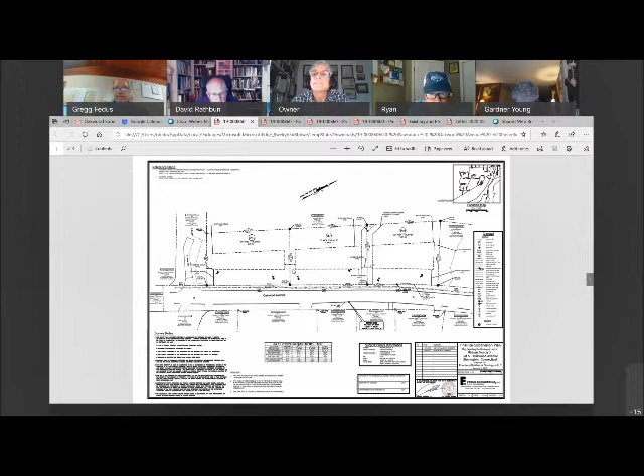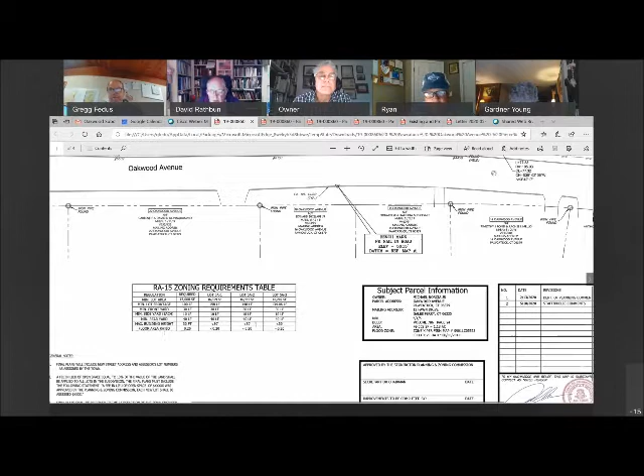So there's the 3 lots. I'm going to blow up the zoning table for the RA-15 zone. As you can see, the minimum requirements are all met: front yard, side yard, rear yard, height, floor area ratio. I'm going to go into the site plans for each of the lots next.

These are the three site plans with a proposed house and garage on each of the lots. Just to put the retaining wall issue to bed, those retaining walls, although we don't show a specific height, if you interpret them they are probably over 3 feet and they're in the front yard. So you can make it a condition that no retaining wall on this project will be above 3 feet within the front yards.

Most likely we're going to remove them completely, but we did a conceptual kind of design, a feasibility design with the three houses shown. There's a driveway off of Oakwood Avenue for each of the lots, and there's sewer and water for each of the lots.

The proposed grading - it is a sloping piece of property that slopes from, I'd say, north to south, from the back of the property, more towards a little bit of a southern direction at Oakwood Avenue. And there's definitely some drainage issues that are going to be brought up by neighbors, I would expect. But what we did was put 2 rain gardens on each of the properties.

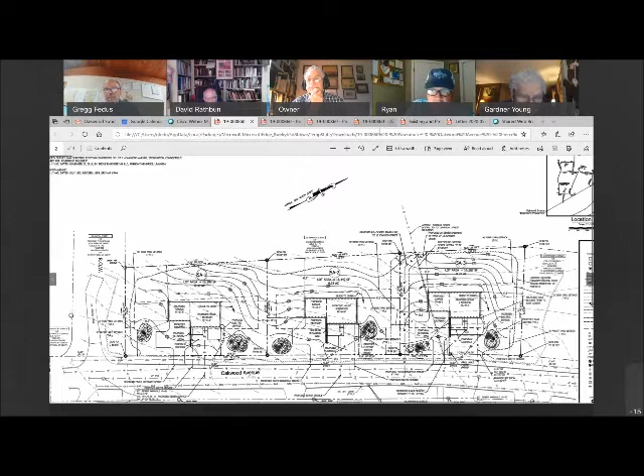Let me just flip to the next. So this is the erosion control plan, which basically shows the three anti-tracking pads, shows silt fence down gradient of all the disturbed areas, and then has the construction sequence and all the notes regarding erosion control and what we're going to be bound to do to basically keep silt and sediment on our site.

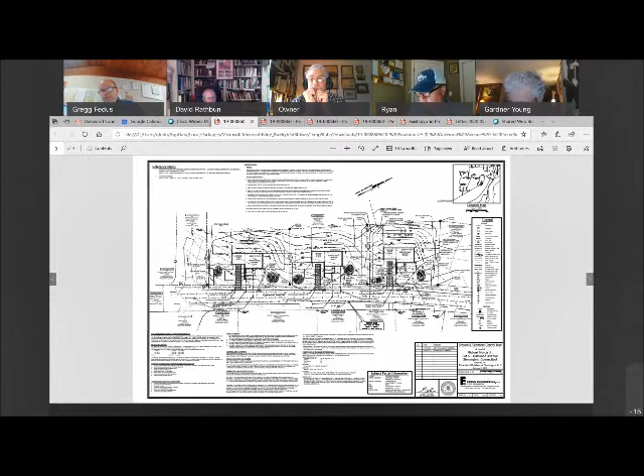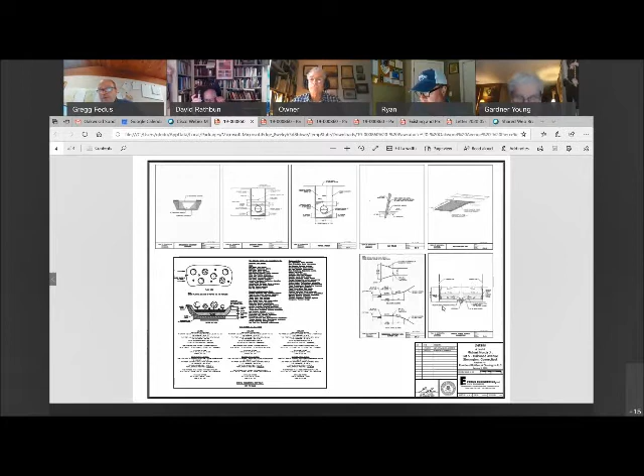The last sheet is the calculations of the rain garden, and then the trenching details and so forth for sanitary sewer, driveway design. These are all Town of Stonington standard details. See, that's our original application, which you have in front of you. That's the property survey. I have it up ready if someone wants to talk about it.

This is the letter written to Keith on May 20th, a summary basically for the stormwater. Typically we don't go into this much detail on a subdivision that's just a single family house on a 16,000 square foot lot, but we wanted to show the commission, Keith, and the neighbors that there's a reduction, again for the smaller 2 to 10 to 25 year storm, which is typically what we would design for, probably even less than that for this type of development.

Typically what DEEP likes to see, and historically what most towns, including probably Stonington, is for a single family house, you capture the first inch of rainfall, which is what our rain gardens show, capturing at least an inch. But you can see the 2 through 25 year storms do offer a reduction. There might be one case, lot 3, 2-year storm, with a 0.05 CFS increase, but then it drops down for the 10 and 25. The 50s go up by about 0.5 CFS, and the 100 years go up by about 1.3 CFS. Again, a real drop in the bucket when you're looking at the entire watershed and Oakwood Road or Oakwood Avenue.

So I feel like our 3 lots, we've gone above and beyond with the stormwater, really taking into account the roof leaders and most of the drainage. I'm just going to flip to that. That's the existing drainage for each of the lots. You can see basically everything runs to the front, to the southern corner of the lot. Then here the darker shaded area goes to rain garden 1, and the other hatching on the lot goes to the other rain garden. So there's not a lot left over we're not basically treating and retaining a little bit and infiltrating some of it into the ground. I think we did go above and beyond regarding stormwater.

We're definitely not going to cause any problems on Oakwood Avenue from this development. There are problems, I'm not disputing that there aren't problems there now. Some of them can be fixed pretty readily with allowing some kind of outlet down below. I know the neighbors have met with the Public Works Director to talk about that. I don't know what the exact results are from her. And a couple of the driveways definitely could use a little bit of work in order to keep water on the road so it doesn't run down their properties.

I think that's it, unless there's any questions regarding the project. Again, I think we got positive review letters from everyone at this point, and if there's any questions, we'd be happy to answer them. Thank you.

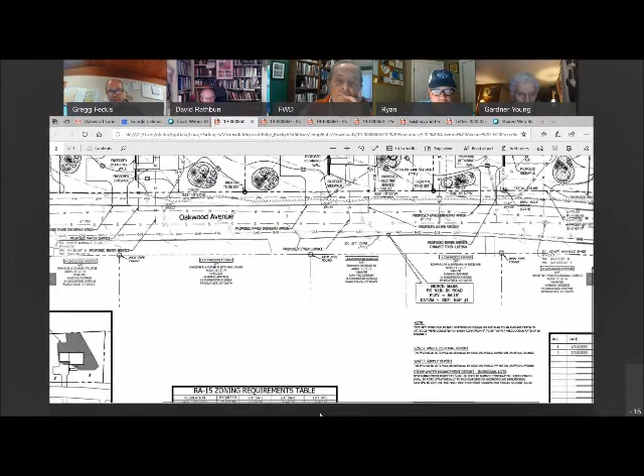Yes, Mr. Chair, this is Ben Philbrick. Where, Gregg, exactly is the ponding occurring now? Can you give me a street address? I know it was mentioned in one of the emails from the neighbors. Let me see. So this is 26 on the right of way here. I believe it's further, it might be the next property down to the south. It's away, but it's further down. I do have some photos I could bring up of it if the commission was interested.

It might take me a minute. To the south of 26 Oakwood, you say? Yeah, definitely the south of 26. Okay, thank you. Yes, sir.

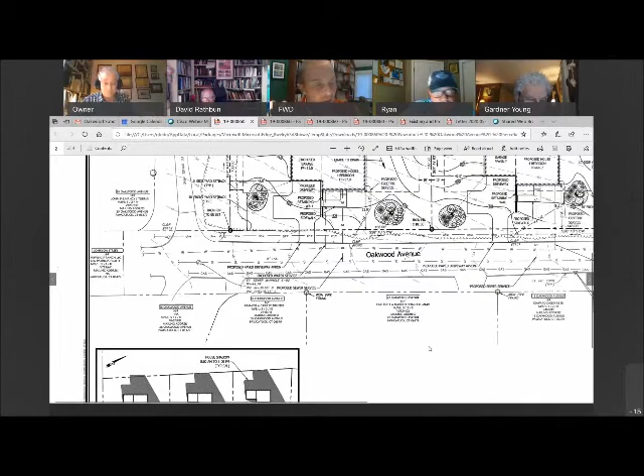A question here, this is Fred Dykman. What sort of maintenance of these rain gardens is required to keep them effective over the years?

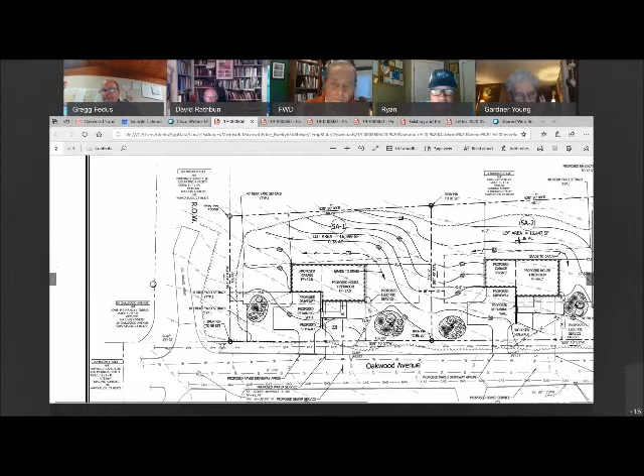I think it's like any mulch. Some rain gardens, they put a layer, it's kind of like any mulched area. You should take the mulch out, kind of freshen it up every year, so it doesn't create that matting that doesn't allow water to go through. But other than that, the plants and the design... flip to the design, and I could add, I don't know if it's on there or not, a maintenance and operation condition to the rain gardens, but let me just blow that up for you.

So there's a layer of crushed stone on the bottom, then a topsoil and sandy mix. They add the sand to the topsoil so it has some porosity. And there's a filter fabric kind of protecting that stone. For this mulch layer, some of the contractors have been putting in river stone instead so it doesn't float away. This is directly out of the approved rain garden detail, so we found that mulch does work.

Only 3 inches of mulch - the maintenance would be, when you take care of a garden, you have to basically do something with that mulch. Otherwise it's just going to get matted down and you're going to want to remulch it. So it's going to be up to the homeowners to maintain that over time, or the rain garden will cease to be effective, and we will then have water running onto Oakwood Avenue.

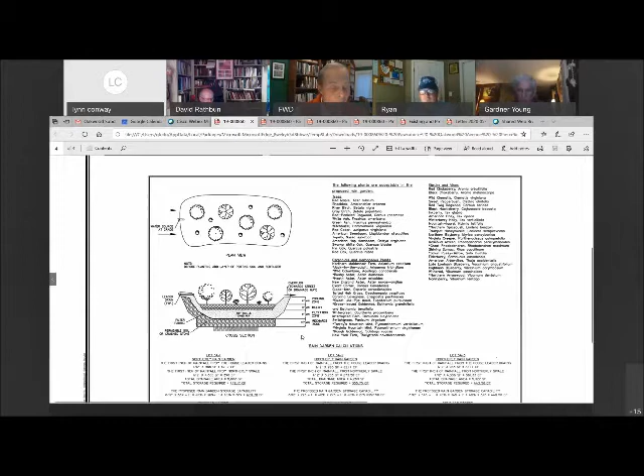Keith might be better to answer that, but I think if it's part of the approved drawings, it would be required to be put in that location and required for CO. As for the maintenance and operation of a rain garden, since we don't have specific requirements, I don't know if we had anything. I'd have to check the erosion and sediment control plan, but I don't think we had anything specific on this site. We'd be happy to add that.

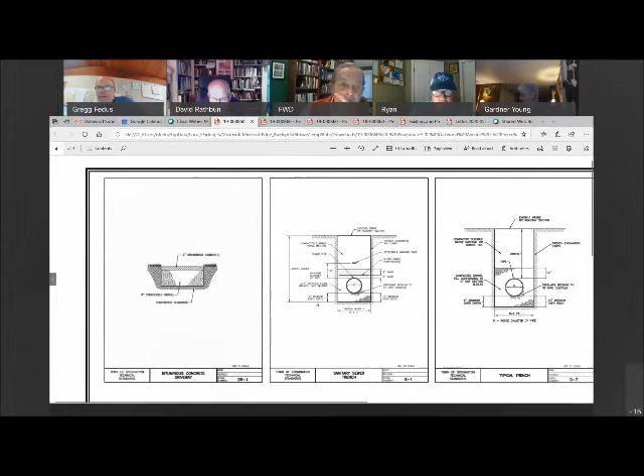So it's part of the approval. It's pretty hard to enforce a rain garden on a private piece of property. How would we police it?

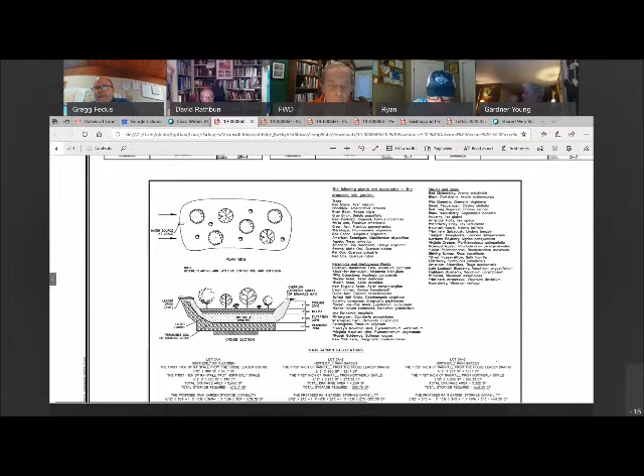Yeah, so I think what we've done here is kind of best management practice originally, which was capturing the first inch of rainfall. When you have a road that you're putting in, you clearly need to deal with the stormwater with detention basins that become part of it. Again, Keith might have a better answer, but I think they're required to be installed, and as for operation and maintenance, I'm not 100% sure of the responsibility once it's approved and built.

When the town takes over a road, becomes a town road, do they take ownership of the stormwater system?

But in this case, yes, you're correct, it's single family homes. This is not the typical treatment for a single family home where we have kind of double the rain gardens, double the size, just in order to not exacerbate an existing situation on Oakwood Avenue.

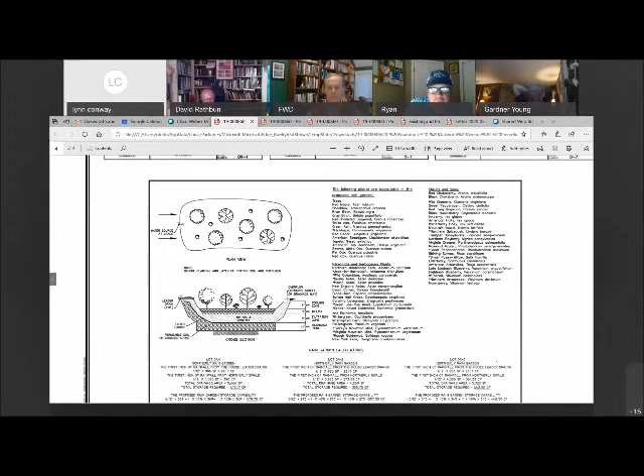Maybe I could ask it in a different way. What's an alternative to having a rain garden that would have to be maintained by the owner and would not really be policed in any way, versus isn't there another engineering method you could use on these lots that would have the same effect and not have that maintenance aspect to it, so that it's kind of built in?

There's some other options. We could do some underground infiltration, almost like septic system galleries that provide storage underground. We could size them accordingly so they perform the same, and as our calculations showed, those would require less maintenance and operation, but they'd still be a drainage structure on the site, and they'd have to have an overflow. So basically they'd be the same thing, just all underground, with some kind of overflow system if you get successive storms, or in the dead of winter you have freezing conditions and the system fills up.

It's only going to infiltrate so much, so there's still some maintenance, maybe not as great, maybe not as easy to install, but we could — typically we do get that request from contractors when they want to build something like this. Some people don't want rain gardens, some don't want to see any of this stuff. So there's definitely options, we'd be open to doing underground infiltration that does the same thing, but there would be—

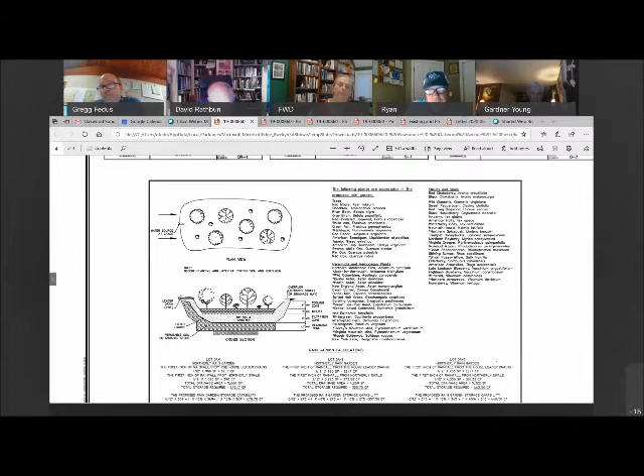Okay, so Mr. Chairman, I'm sorry, I had my mic muted. This is Chuck Sheehan. Before we get to the public input, could I ask just a couple of questions of Mr. Fedus? Yes, thank you. Sorry, I miscued on the mic there. Thank you, Gregg, for the presentation. Thanks for the additional details on the drainage maps and the drainage calculations.

First question is, it appears that some area to the west of this site also flows across this property. So the calculations that we saw for each lot, does it consider all of the drainage area tributary to that lot, or just what's on that lot?

It's just the incremental from the existing conditions to the proposed conditions.

Have you analyzed how the systems will function based upon the total runoff, considering that a lot of this water is coming from the west, from the other land across these systems, how the systems will perform when they're inundated by the additional runoff? We did not analyze that. It appears to be fairly significant.

And to Lynn's point, what are the other options? Is it an option to put a retention basin to the west of these lots, behind these lots, that would detain? It looks to me like the real problem is not the incremental difference in these lots, but if you could detain the upstream water from the west side of this subdivision somehow, you could make a major improvement.

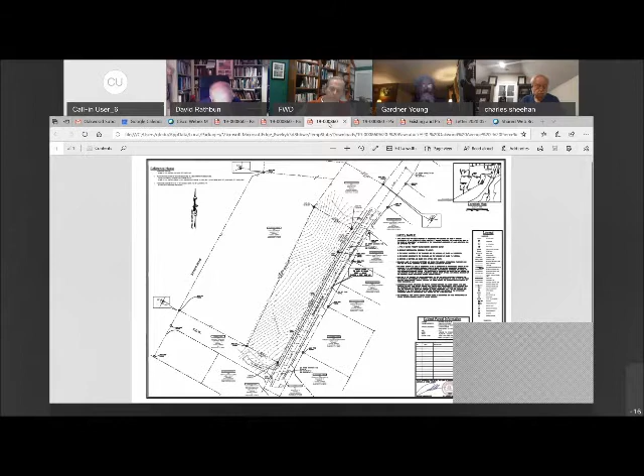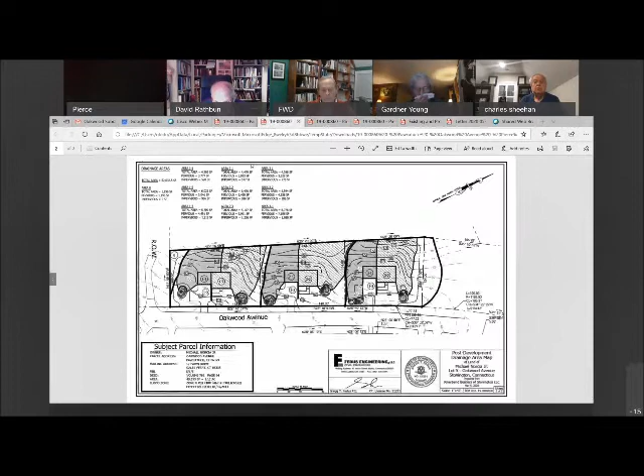Thank you, Colleen. Anyone else like to speak in opposition to this application? Anyone showing up, Keith? No, and if you're on a computer, don't forget to unmute your microphone if you are trying to talk. Hearing none, any general comments on this application? Hearing none. Mr. Peters, would you please rebuttal? You there? I'm not sure that - oh, you're on. I'm on? Okay, sorry about that. This is Gregg Fedus with Fedus Engineering.

There was a lot said there. I think the bottom line is we did meet all the regulations for subdivision, zoning, and the technical standards. If the easement for the sewer line needs to get worked out with the WPCA and town staff because it's not adequate, we're flexible on that account.

I did take a quick look at the questions from Commissioner Sheehan regarding the property to the north or northwest and what drains onto our site. There is a portion of the lot to the northwest that does drain onto our property. It is wooded, and according to the property records, it is a house from 1900.

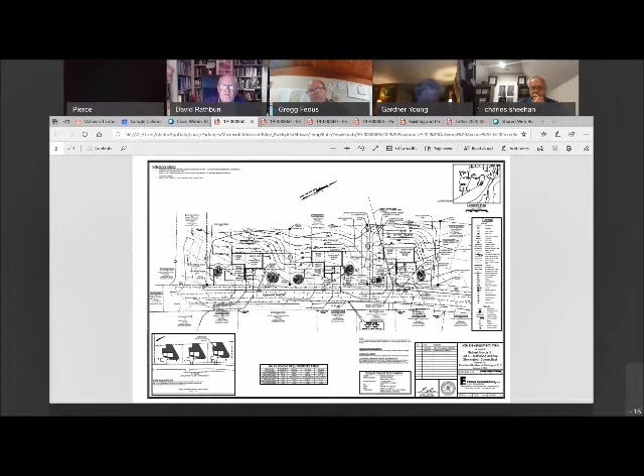I'd like to comment on the driveways. It'd be a challenge, again, we went overboard on the rain gardens to deal with stormwater from the yards as well as the roof drains and a portion of the driveways. It'd be a challenge to grade those driveways to go to a rain garden because the lot is going uphill, and there's just not an easy way to do it without carving out even more material to flatten the lots and increasing the grading in the rear, which would cause other issues.

So I think we did a nice balanced site. We took into account by far double the stormwater that a normal site would take in this case.

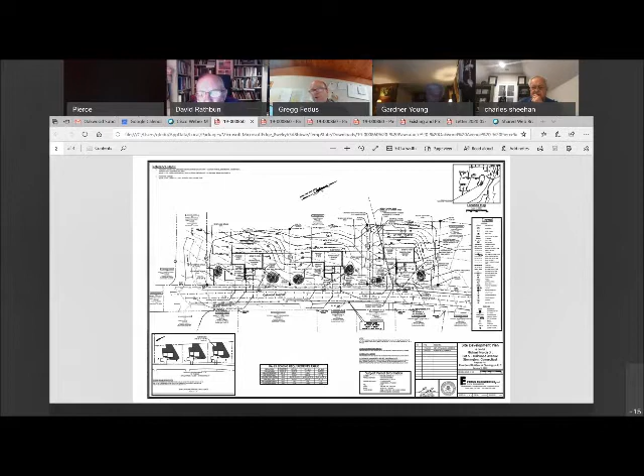Again, just to address the gas situation, my client doesn't have, he's not intending to tie into the gas at this time. I'm not sure that's a requirement right now. We have other means of getting heat to the three properties, whether it's oil or propane or electric, solar. There's plenty of options. I'm not sure that he's tied to dealing with the gas line that's in the street right now.

I have a couple questions. What is the surface of the driveways? Bituminous concrete, asphalt. Could you make them not bituminous concrete, asphalt? I don't know if my client, I believe, was on the meeting. Well, that would help in the drainage if we didn't have that blacktop driveway.

And the other thing I have is the trees. Colleen mentioned a lot of large trees. There's no showing anywhere any trees are going to be saved. Which ones are on the town property? I'd like to see which ones are on the town property and to see what trees they'd be tending to save.

I've been on Oakwood Avenue several times. The property line is not that far from the edge of pavement, and I don't recall any large trees within that right of way. Are there any large trees on the property?

There are some larger trees. If you follow my mouse, we're going to be saving as much as we can on the back of the property. You can see the proposed tree line, along the northeastern property line here, and along the southwestern property line. There is a little bit of no grading located between the two lots, and similarly on these, no proposed contours. So if there was an existing large tree in there, we would save it. The sewer line needs to go through there.

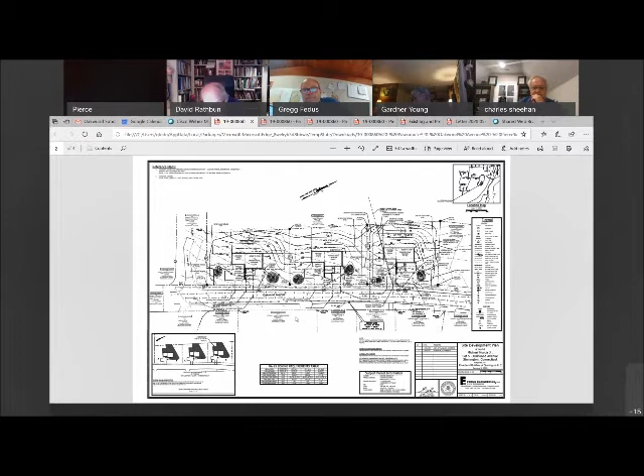Well, if you just want to make a field, I mean, that's all I'm saying. Anyone else like to make any other comments?

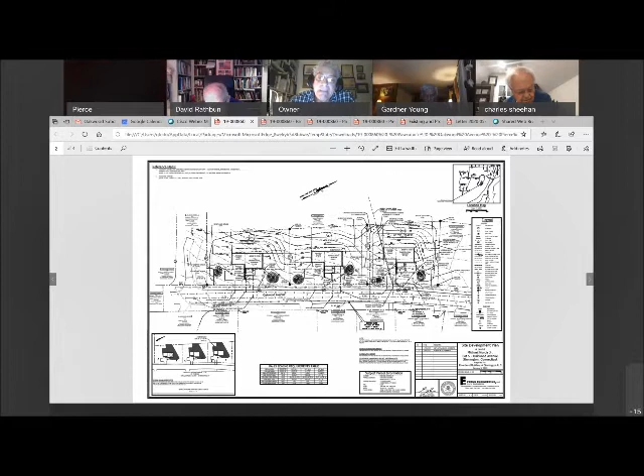This is Ben Philbrick. On the subdivision, are there any passive solar requirements on these houses? Yeah, so we addressed that on the same.

Remind myself of what we did here. I haven't seen a house drawing, an elevation, or a roof plan. We did the house shadow plan, which is per the regulations, 8 a.m. to 3 p.m. at a maximum building height. And then underneath that is the passive solar orientation.

Proposed buildings and new vegetation shall be sited with respect to each other and to the topography of the site so that unobstructed sunlight reaches the structure between the hours of 8 and 3. So that means a lot of trees would have to come down in order to make the solar work effectively.

Thank you. Any other questions at this time?

This is Lynn. Can you address the point that was made having to do with the sewer lines being kind of shared between two lots versus totally on one lot?

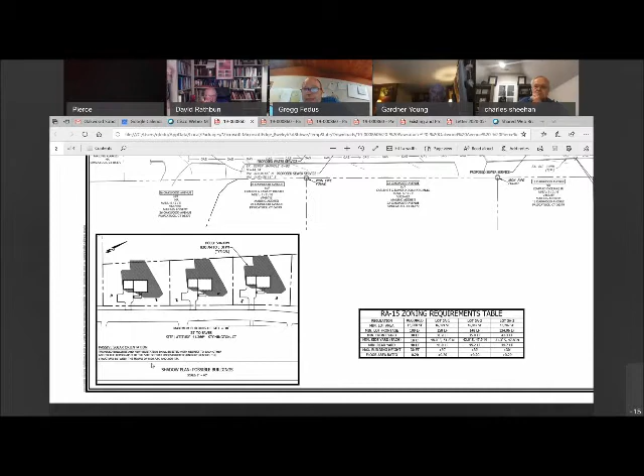So we're not sharing any sewer lines for our three proposed houses. What happened was the owner of 12 Johnson Street, who at one point owned this property that were the subject property. So instead of...

Someone can correct me if I'm wrong on this, but my understanding is that there was ledge to go onto Johnson Street, and this was kind of the easiest way to get a sewer to his house up here on 12 Johnson. So he connected into the existing sewer lateral and ran the line. You could see it with the hatch in it, all the way up to his house.

So we're going to relocate that, give him his own line, and the best place to put it is near the property line. But it's got to be somewhere it can connect in where it crosses into his property, so there's not a ton of choices. It has to be somewhere between lots 2 and 3, between the two houses. Could we move it over a little bit one way or the other? Sure, but I don't think that makes a lot of sense.

We'd run a new line from the main in the street, run it up, put a 45 on it, tie into his existing lateral, put a clean out there per WPCA regulations. And it's all done on our property.

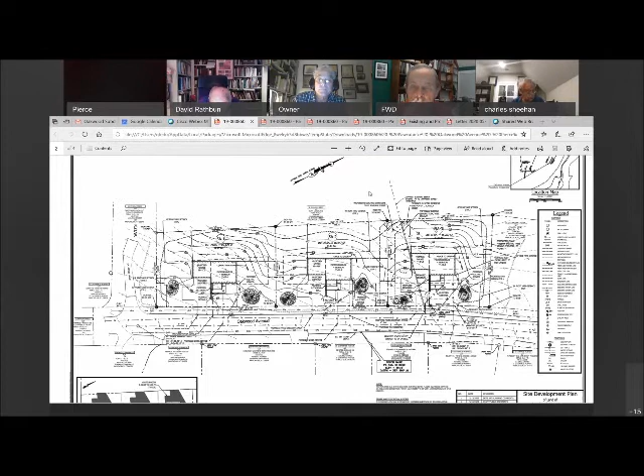Any other discussion? Yes, this is Ben Philbrook. Just to be perfectly clear about this sewer line, it is offset from the property line between lots 2 and 3, correct, Greg? That's correct. You wouldn't put a fence down the middle of that property line anyway, would you? I don't know, it depends on how the easement's written. Typically we'd write an easement description and send it to the town attorney, and Keith can jump in anytime. It gets approved by the town attorney or the WPCA. They may say they don't want anything built within that 20-foot easement. In that case, if you wanted a fence, you could put it on the edge of the easement. Got it, thank you.

Any other questions? Hearing none. Keith?

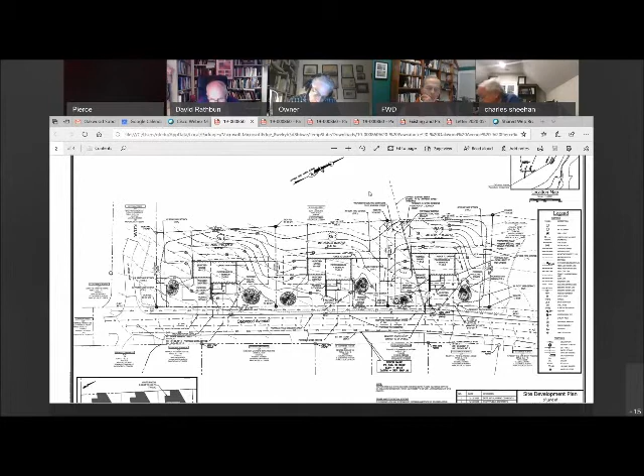Just to answer a couple of questions, zoning allows easements and sewer lines in the setbacks. There's something in zoning about double counting certain things, but nothing about prohibiting easements in the setbacks, and often they're the best place to put them so they're not interfering with what other people are doing on their properties. The shadow plans, for some reason, our zoning regulations say the shadow plans go up to 3 p.m. I'm not sure why that time was chosen, but it looks like it's been in our regulations for about 30 years or so.

Let's see here. So we talked a lot about the comments we received already. Our consulting engineer did say his comments were addressed. The Conservation Commission recommended a fee in lieu of open space for this application, meaning instead of setting aside land as open space, they'll pay a fee the town can use for open space elsewhere, based on an appraisal the applicant will have done. DEP's Office of Long Island Sound Programs reviewed this and recommended directing downspouts to the rain gardens, which they did in their plans.